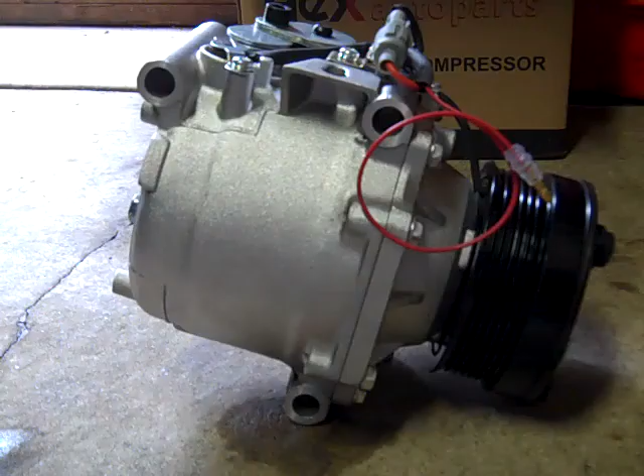Okay, in today's project I'm replacing the AC compressor on my 99 Saab 9-3. So to begin, I'd just like to give a little background information on what models this would apply to, why these AC compressors fail, what's the most common reason for having to replace the compressor, and then a quick overview of how the replacement is done on these.

So first of all, the 99 9-3 that I have - this process would also apply for all the old generation 9-3s from 99 through 02 and the 03 convertible. Also very similar would be the new generation 900s that were made from 94 through 98. And there's a lot of similarity to what I'm going to say that applies to the old generation 9-5s as well, that started production in late 98, the 99 production year, up until near the end when they began to produce a new generation 9-5 right at the end.

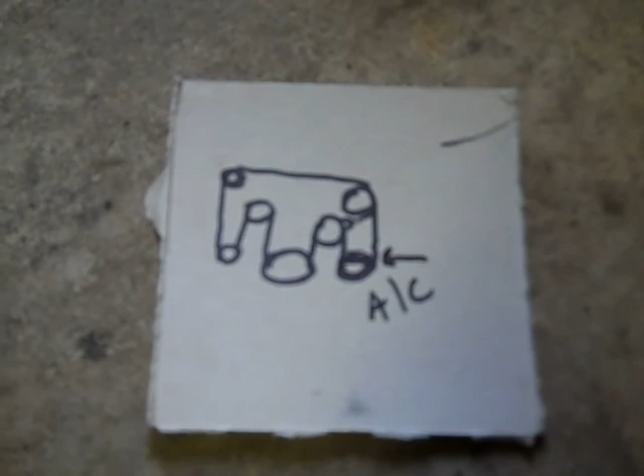So let's go start on our project for today. Now, anytime you take a belt off a car where you're not familiar with it, it's a nice idea to just make up a little diagram, because you may think you'll remember how it goes on, but you can be surprised - you just might not when the time comes to put it back together again.

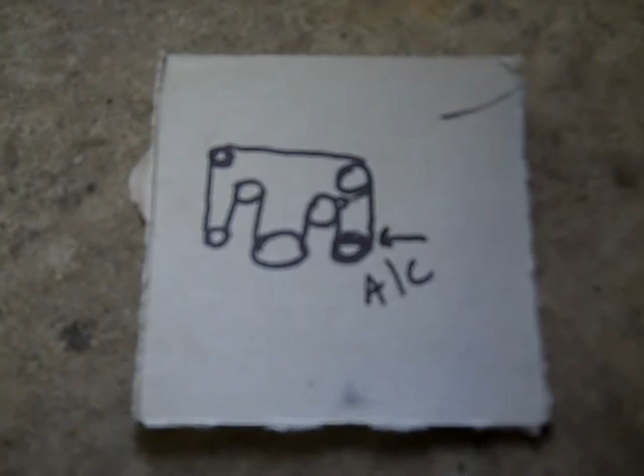But what I found, I really didn't like that, because when you would have it in drive, the belt tended to set up a bit of a vibration, and I think it put extra stress on the water pump, the way this was routed. It's just kind of my feeling on it, I don't know, but I think when you eliminate the AC compressor, it puts a little more stress on this water pump bearing. It's not as evenly distributed on there, and it may lead to the bearing failing on the water pump.

But that is an option. You can run a shorter belt if you don't care about the AC - if the AC is not working.

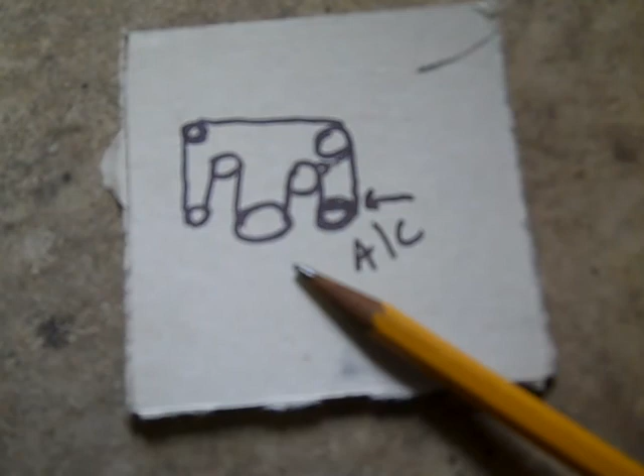So anyways, here's your belt diagram. Just make a little diagram, draw your little pulleys, and draw the belt around the pulleys, and make it much easier when you go to put it back together again.

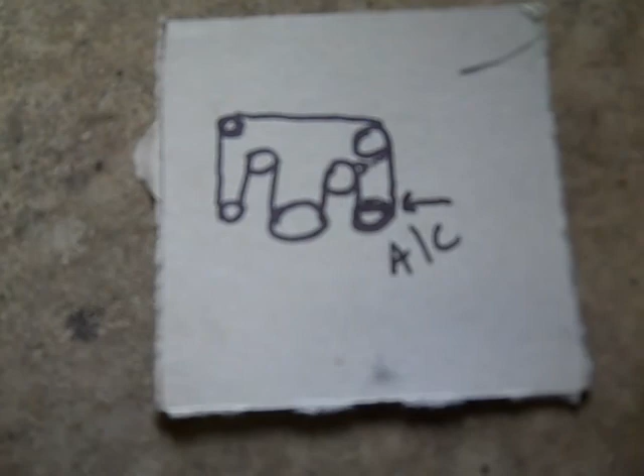Now actually, I'm not going to take even the belt all the way off. I'll just kind of move it out of the way here from the compressor when I do this. So let's go take a look at what's involved with taking the belt loose on the car.

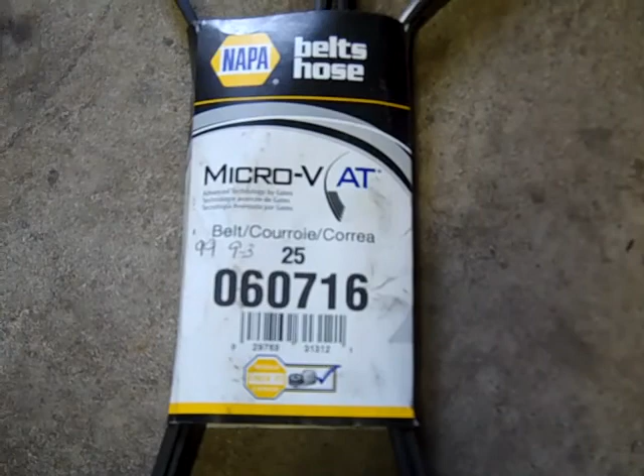Here's the part number for the NAPA belt that I used, which may help you if you decide to, or even as a temporary fix, if you want to just put a shorter belt on there until you figure out what you're going to do with your compressor. Here's the part number for a NAPA belt that will fit.

Okay, to release the tension on the belt, you'll look down at the tensioner, and you can take a 1/2 inch extension. Make sure it's seated - I've seen people crack these. You see the receptacle there? Saab has a special tool that fits that perfectly, and it's angled, you can put it in there. But a half inch bar is what most people have, and that'll work.

But make sure it's fully seated. Sometimes you'll get crud and stuff in that hole, and you may not really have it fully seated. Then when you go to put leverage on it, I've seen it happen many times - people crack these, break the ear off, and then you've got no way to grab it. There's quite a bit of tension on a tensioner, so there's no way to really move that easily once that's broken, and they're fairly expensive.

So get that seated down there, and then you want to use an Allen wrench - this is actually a little tool that comes on a new tensioner, because when it comes, it's in the tensioner. So you take the tension off. There's a little hole you can slide this into - it's pretty self-explanatory. You'll move your bar back and take your tension off the belt. There's your tensioner down there.

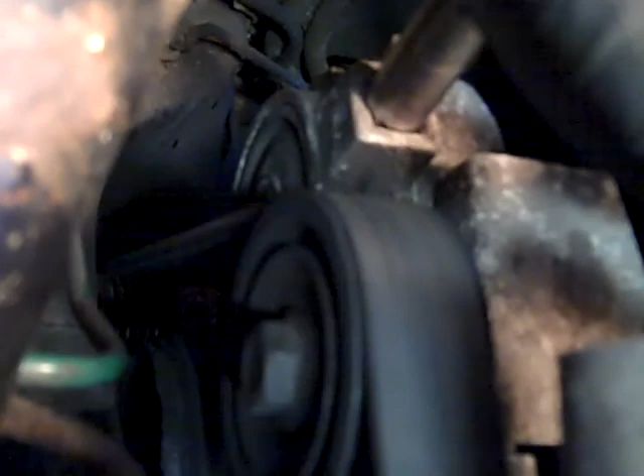Now, just to mention briefly, this top idler pulley right above the tensioner is an extremely common failure item on these Saabs. I'd say they go about every 60,000 miles because they're just a sealed bearing. I've seen them go many times without any warning - they won't even start making noise first, and they'll fail and can leave you stranded. They're not very expensive, and they're very easy to change.

So what I do with any Saab I get - if I don't have a service record of when this was changed, I'll just go ahead and change it immediately when I get the car, rather than have a failure and get stranded. Just a recommendation: if you don't know when that was changed, go ahead and put a new one on.

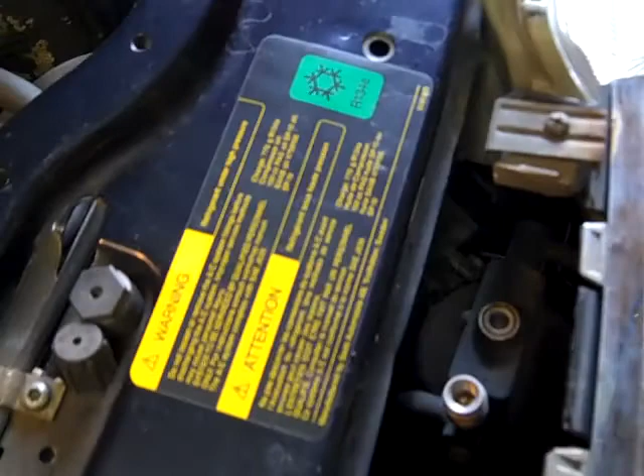Now you're going to want to discharge your AC system, and the proper way to do it is to use a vacuum pump and have it evacuated. If you don't have the equipment for that, you can take it somewhere and have them do it. If your system is old and there's no longer any refrigerant in it, and you're just changing the AC compressor, then you don't have to worry about it.

You can very carefully check it by taking off your cap and giving a little press on the valve - of course, using all safety precautions and goggles, because there'll be quite a bit of pressure in there if it's full, so you don't hurt yourself.

Now mine, originally my AC was working a few years ago when the compressor first started making noise, but it's discharged over time, because just now I took a screwdriver and there was only a tiny little bit of pressure in there in the system.

So what I'll do when I go to recharge it is put some dye in there. It's fairly inexpensive - you can get a dye kit. It comes with special goggles and a light, and it'll show up.

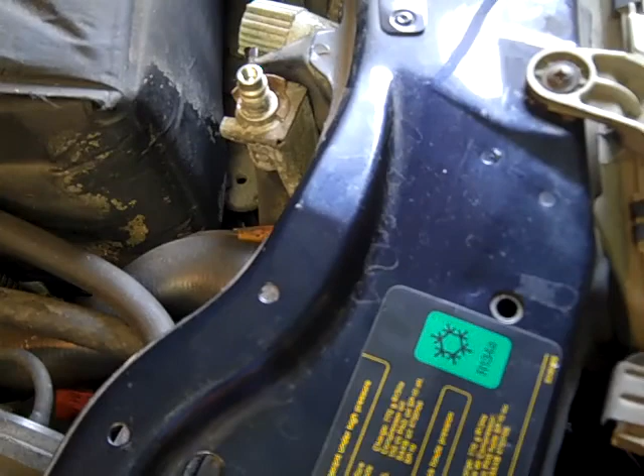So I always advise, when you recharge these, put some of that dye in there. The common failure on these systems as far as leaks go, there's a couple hoses down here under the radiator, and those are a common failure item. Anything else could leak too, but your condensers usually don't go, and your evaporators hold up pretty good, but here and there they'll go. Most of the time it's a couple hoses that'll fail on these and leak.

So anyways, the other thing as far as discharging it - before you take your line off, it's kind of hard to see down here, so get a light. Down there, you see the radiator hose, the lower radiator hose attaching to the water pump on your left, and on the right you'll see an AC hose. Right down there next to it is that 13mm bolt.

You just take an extension, take that bolt out, and then you can pull up on it. But I recommend leaving it sealed up until right at the end - it's never a good idea to leave these open to the air for an extended period of time. So I like to open it up at the last minute before changing the compressor, I'll save that for last. Now I'm going to go under the car and get everything loose and ready to take the compressor out.

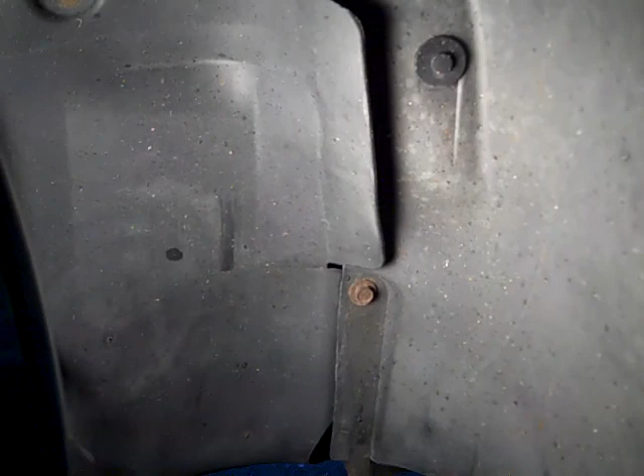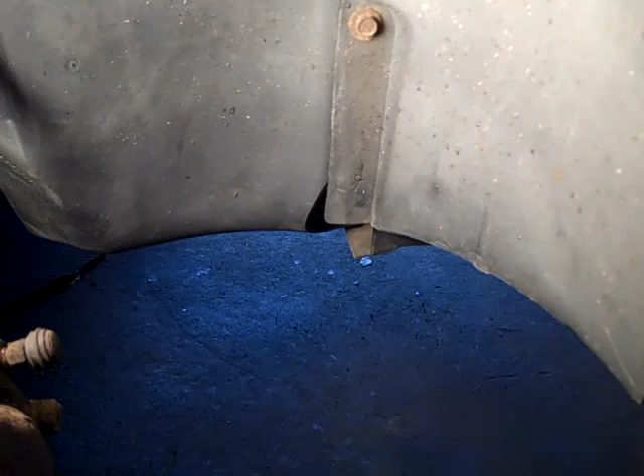Now I went ahead and took the wheel off. You're going to want to do that, just for ease of working on it. You could try to work your way around it, but take the wheel off, jack it up. Now I put 2 jack stands under it. You want to be safe. Don't ever take a chance with your life, because you're going to be laying on your back working under this right front corner of the car. So I went ahead and put 2 jack stands under the subframe on the front here. Now the first thing you're going to do, there's this shield here, a belt protector.

Pretty self-explanatory, that comes off. Most of them are 8mm. There's a 10mm here that goes through a little clip to your inner fender well here.

It's up to you, you could take the whole thing off, or what I'm going to do is just take the lower front part of it loose and peel it back out of the way. If it starts to aggravate me or be in my way, then I might go ahead and take the whole thing off. The only thing is, you see this plastic 10mm nut, it goes on a little stud that's welded to the body there. And I've found over the years, any car from up north where you get some salt or anything, 9 times out of 10, even though it's plastic, you go to take that off, it'll snap the stud off. You may be able to spray it up, get a little something on it, but it's very likely that could break off. You can always drill a hole and just reattach it there with a screw, so it's no real big deal.

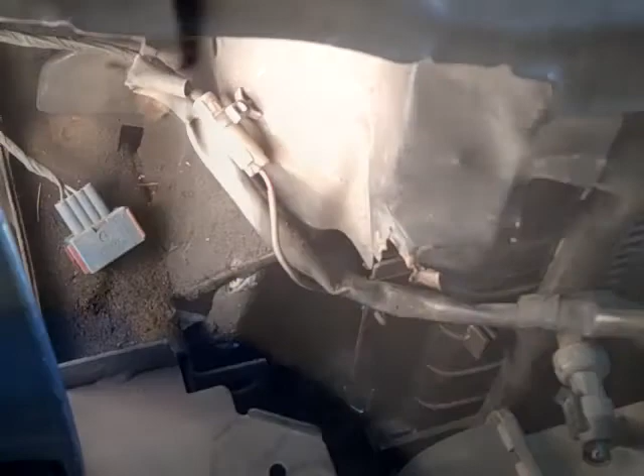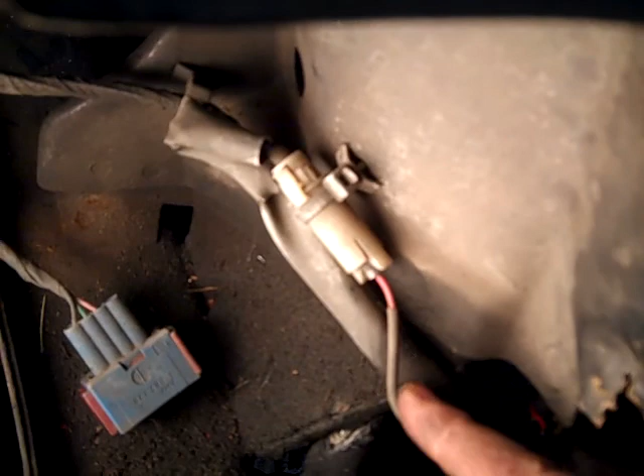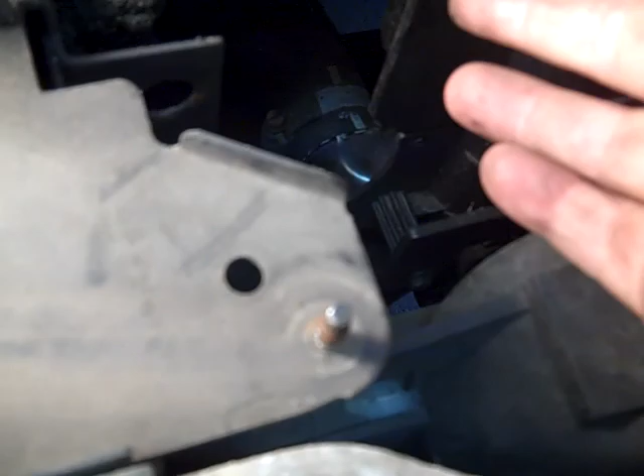Now I just wanted to show you something. The power feed for the compressor is behind the headlight. You can actually get at it without taking the headlight out, but it only takes 2 minutes to take the headlight out. And if everything's secured as it originally was from the factory, you might want to do that, because the wire also has a little push pin here that secures it to your radiator, which is hard to get at. So just pop the headlight out, and then you can get at your power feed wire here. And when you put your new one in, it'll be easy to route the wire up here the way it's supposed to, out of the way, so it doesn't interfere with the belt or anything. So just a little tip there, don't mess around with it. Just take the headlight out, it's a lot easier to access it.

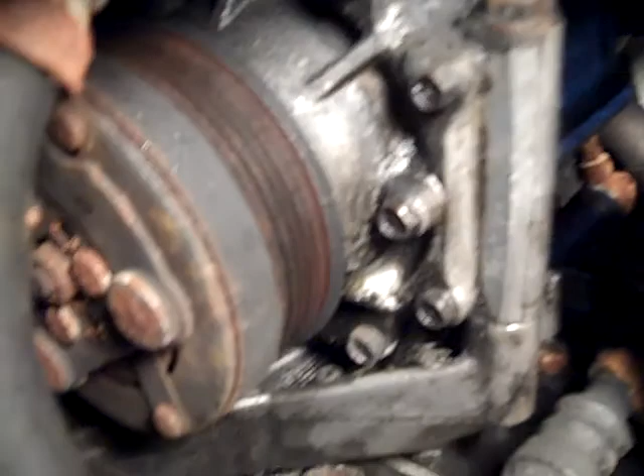Now with the shields out of the way, you can see the compressor. You've got these oil cooler lines that'll be kind of in the way, but you'll find once you get the compressor out, you can just gently bend these down. You'll be able to pull the compressor out.

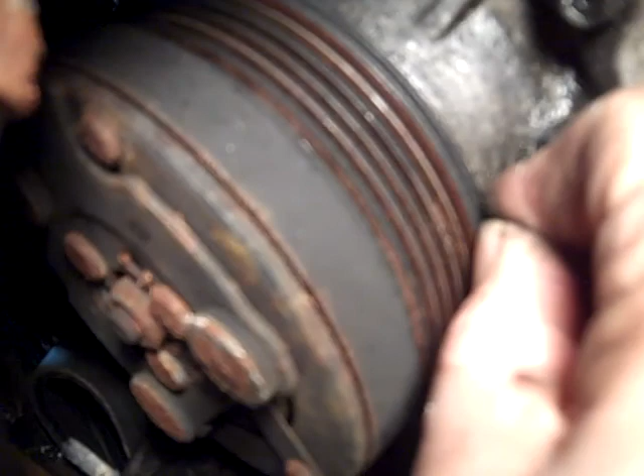Just wanted to show you the pulley here. I can actually, you can hear it there, the rumble. And then if you can hear the little waka waka waka, you don't see a whole lot of visible movement there unless you look closely, but that's what it is. It's rocking back and forth here, setting up that noise. So that's the problem.

So here you can see one of your, I believe these are 17mm, if my memory serves me right. There's 3 of these you've got to get out, and I don't remember which ones, but perhaps this is one of the ones where you actually don't have clearance to take it all the way out because they're long. So what you have to do is take them loose and then leave them in the compressor itself.

But as you go to take the three bolts out, I'm going to access the other two. I believe the top one toward the left side of the car I can get from the top - I'll reach down by the radiator and get it. The upper one on this side I can probably get right through the opening here, and this one is easy from the bottom. I'll get those loose, but before I go too far, I'll have to disconnect my AC line from the top.

Once we've got everything loose, the long bolts that I can slide all the way out while it's in here, I'll go ahead and slide them out so I'm not having to mess with them. But you'll have to remember which ones you had to leave in here and pop them into the new compressor. The most awkward thing will be hanging the compressor on the hook - sometimes that can be awkward, but once it's hung up there, it's easy enough to get the bolts started.

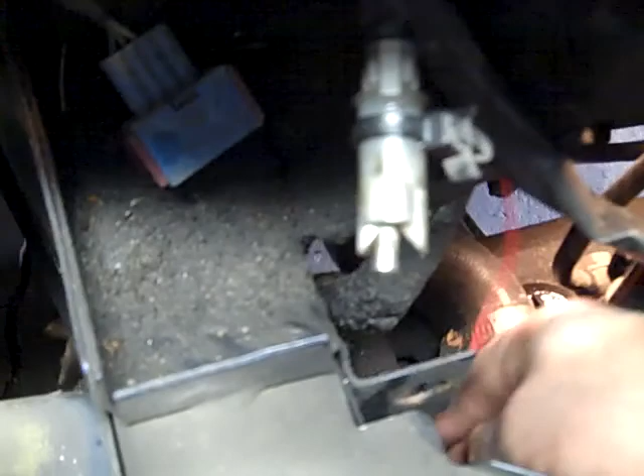Here's the wire connector that I was just showing you. I sprayed a little WD-40 on it because it's a little tight to get out. I pulled the wire through here, and for your new one, make sure this has got tension - snug that up and click it on there, then push it back in and it'll lock in here.

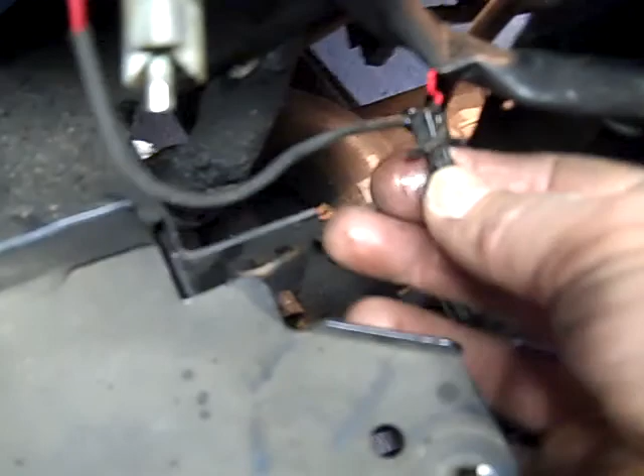And then if you want, you can transfer this little wire tie and clip - it pops into a hole in the radiator there.

Okay, another tip - I end up taking this air intake hose out of here to get a little more access from the top for the one bolt here. And there's another reason for taking out the headlight, because I found that you can actually stick your arm through the headlight opening and it helps you get access to removing the bolts on the compressor here. So just another tip there - I always find that anything that's not hard to remove and gives you a little more room or visibility, go ahead and take it out of the way.

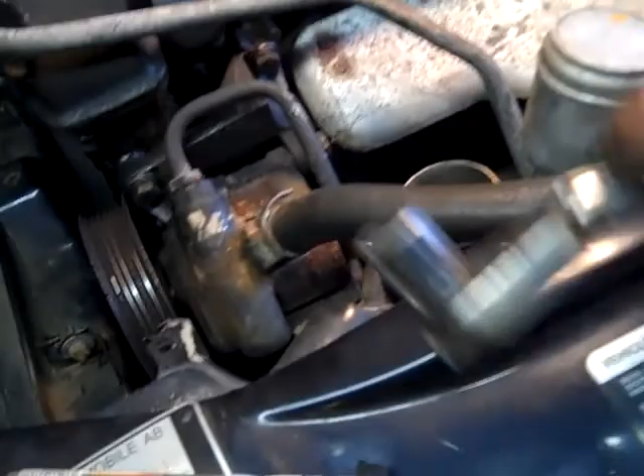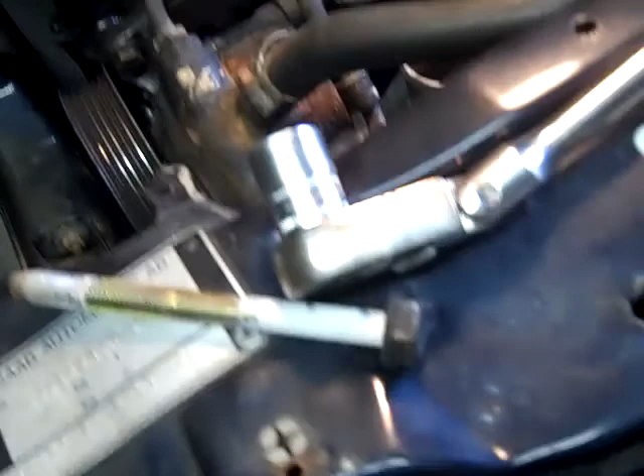Okay, there's your first bolt. Boy, I guess maybe because it dried out, but it was extremely tight. What I had to do is, first of all, I like to use a spark plug style ratchet, because these bolts have a little angle to them, and a straight ratchet may not do it. But you've got to make sure you've got it perfectly seated on there. Then for leverage to actually break it free, I had to take my long wrench and stick it on my ratchet. Just a correction - earlier I mentioned I thought I remembered these being 17, but they're 16mm heads on here.

So this one actually came all the way out. There's enough room between the compressor and the radiator that you can take it all the way out.

Okay, a combination - for the other top bolt, I went ahead and got it from the top. There really wasn't room to reach up from the bottom to get at it, so I got it from the top. Again, another reason to remove the headlight, because I found myself with one arm going through the headlight opening - you'll find a little opening where you can get your hand in there. Then I had to put my spark plug ratchet on it from the top, and it was extremely tight. Again, I think it dried out - I'll put a little lube on these when I go to reinstall them.

But for leverage, I really needed that extra 1.5 feet of leverage on my ratchet to get that loose - very tight. So I've got the two top bolts out, and the bottom one I started to loosen, and that's the one I was trying to remember earlier. That's the one that on this particular model has to stay in the compressor. So when you go to put the new compressor in, you'll have to put that long bolt in the bottom first. There's just three - two on top, one on the bottom. The bottom one is the one you're going to have to put into the new compressor before you slide it back up in there, because there'll be no room to put the bolt in afterward. But these other top two, it's no problem - you can finagle it, reach down there and get them in.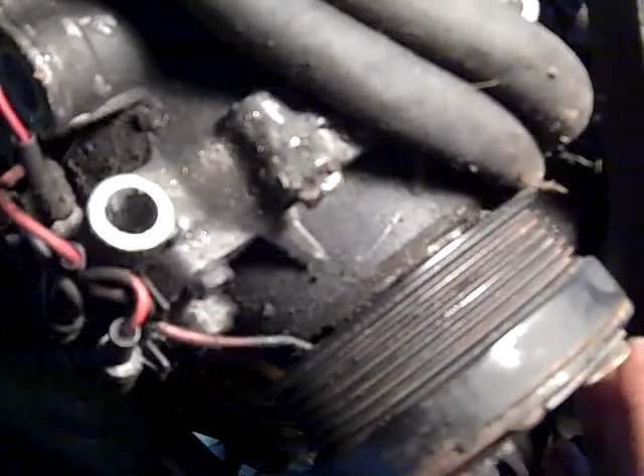Okay, I've got it out, and basically what I'm showing you here is I'm taking it over the top of the cooler lines for the oil. You gotta kind of twist it and finagle and get out of there.

That's not really a big deal. What the big deal is, I remember on these now, there's a clearance problem with this hook. What I ran into, let me show you. It's really what makes this job a pain.

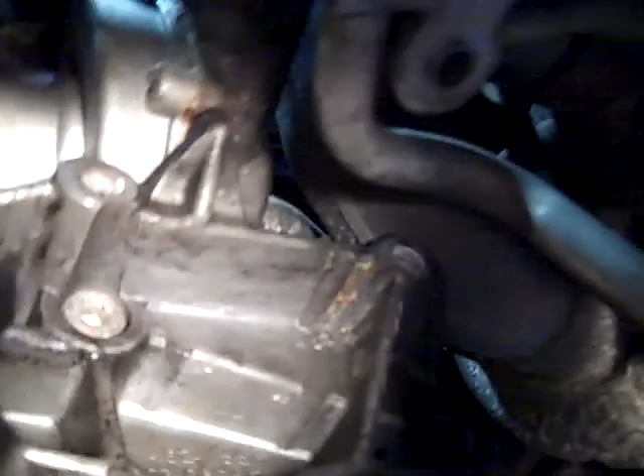You can see up there, see if I can point. This hook here, well, when you're hanging the compressor on there, you see how little clearance there is with the water pump. And the problem you have, see your AC line here, see when I press up it hits the bottom of the hose there on the pump.

So you're running into a clearance problem. To actually get it off the hook, first of all, it's got to be an absolute straight shot. And actually with this one, because of the clearance problem, I had to take my pry bar and give it a little pry under here, which I knew would happen, but it's no big deal.

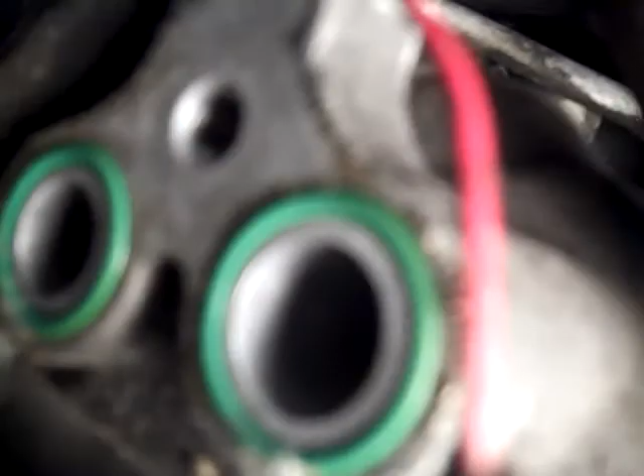Let's see. If you look up here, see the hanger, I just broke it to get it off. But you see how on the top you've got your O-rings, and there's just no clearance.

So I'm thinking, because what I've done before, I only remember doing it one other time, which, you know, my car is going to be the same way. On one car, to get it back in, I just ground an opening on the hanger, on the new compressor, so that I could get it in there.

Because really the hanger is just, theoretically, for your convenience, just to hang it on there because it's heavy, and then you can thread your bolts in. But that hanger, in this case, ends up - it may even be like assembly on the assembly line, you know, they hang it on there. But in any case, it's a problem for me now because the clearance is really just not there.

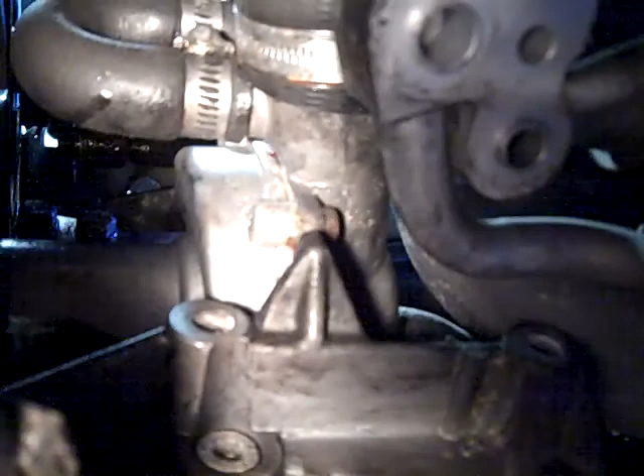You know, when I push up on the hose snorkel there, there's not enough clearance. So the problem I'm going to run into is the reverse of when I went to take it out. I'll go to try to hang it on there, and I won't be able to get it on the hanger because I'll be pressing up against the hoses there, and then you risk messing up your new O-rings - they're in there pretty snug, but popping them out.

And I really hate to do it because it gets messy, and then you're under here. But I'll gain some clearance on the bottom of that water pump. This would be a whole lot easier - I changed this water pump, you know, like a year ago or something. This would have been a lot easier to do when the water pump was out. But anyways...

I'll gain probably enough clearance by taking off that lower radiator hose off of the coolant pump. But what a mess - it'll just keep dripping, the antifreeze will be dripping down here while you're working. I hate to do that.

So I'm kind of wrestling with the thought of grinding the hanger on the new compressor and seeing if I can slip it in there. But just from experience, I know even then it's going to be tight, and I'll be fighting against that hose up there, the AC hose, at the same time.

So I'm going to give that some thought. I don't even think I'll put the new one up in there without grinding it if I go that route, because I just know there's not enough clearance. I couldn't get the old one off. There's just no room.

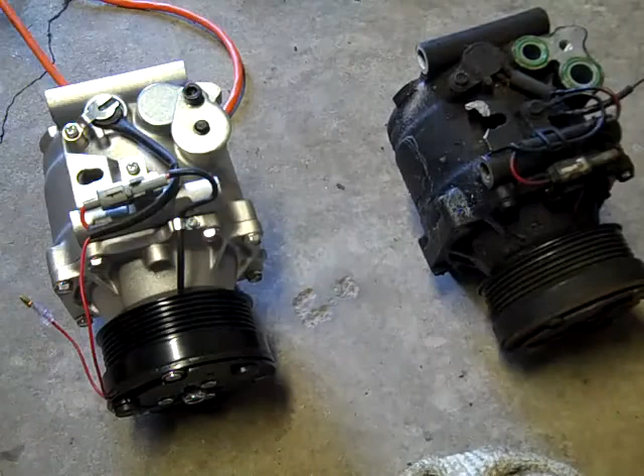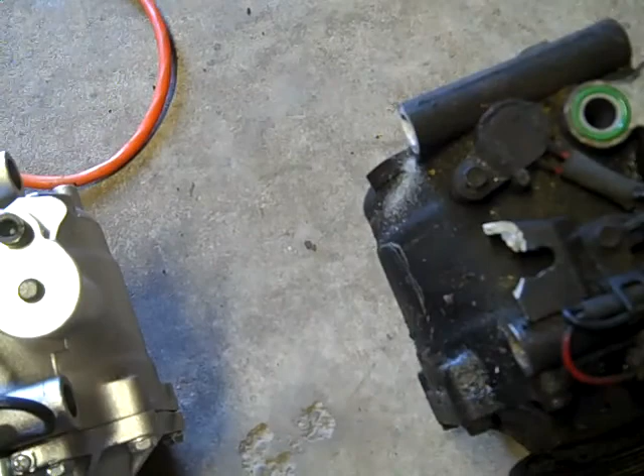Alright, I made up my mind. I'm going to give it a shot with grinding it and see if I can leave the cooling system sealed up. Here you can clearly see how it broke off there. So I know from experience I had it perfectly lined up, because if you tilt this or get it rocked, you're not going to get it off either. It's got to come straight.

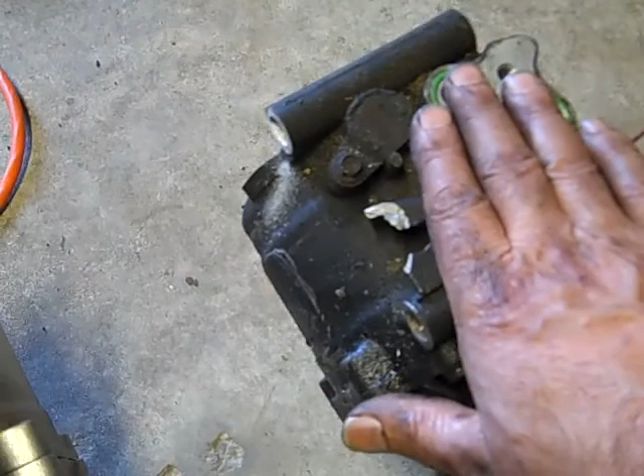You've got to go up off the little ball and then straight out. Because of the clearance problem here, with the snorkel hitting the water pump, I wasn't getting any up, not really anything up. So you've got to go up maybe between 1/8 and 1/4 of an inch, up and over. Then you're dealing too with the recesses on here. The snorkel has about an 1/8 inch part that goes down in these holes, which you don't want to damage either. So going back in, you're still going to be dealing with the O-rings. It's got to go up, and that's got to go in at the same time. That's really the most unpleasant part of the whole job. It's a nuisance.

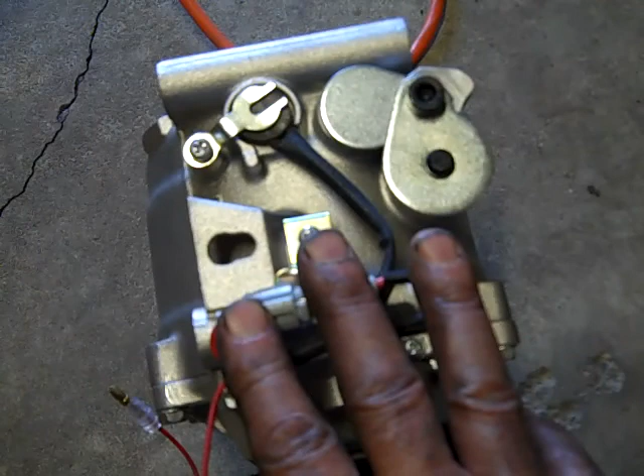I know I'm still going to have to wrestle with it, even doing it this way. But the only thing is, even draining the cooling system, short of taking off the coolant pump by taking the hose off, I'm going to gain maybe 1/8 of an inch where the snorkel can rise up, and I may be able to hang it. Maybe, it's an if. So I'm just gonna take my grinding wheel, and I'm gonna open this up, and give it a shot that way and see if I can put it in there.

Finagle with lining this up with the hose, and then you got to get your 3 bolts started. I'm gonna lube those up, so they can get started in the threads right. So that's my next step. I'm gonna go ahead and grind this and go wrestle with it for a while, and I'll get back, let you know how it goes.

So there it is. Just opened it up nicely. I'm gonna give it a shot.

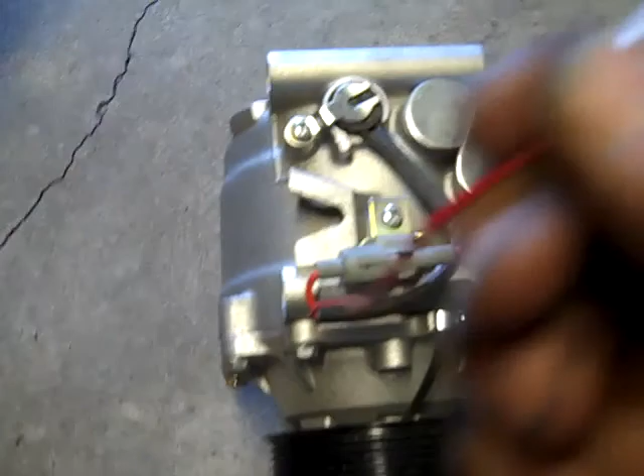Just one other thing I wanted to show you before I went to put this in: the power wire isn't nearly as long as the factory one. So while it's going to reach, I'm not going to be able to put it in the original location. I know this, I can get this to reach because I can move this end here. Just have to make sure it's out of the way. It's one of those things you're dealing with, aftermarket - a little shorter wire.

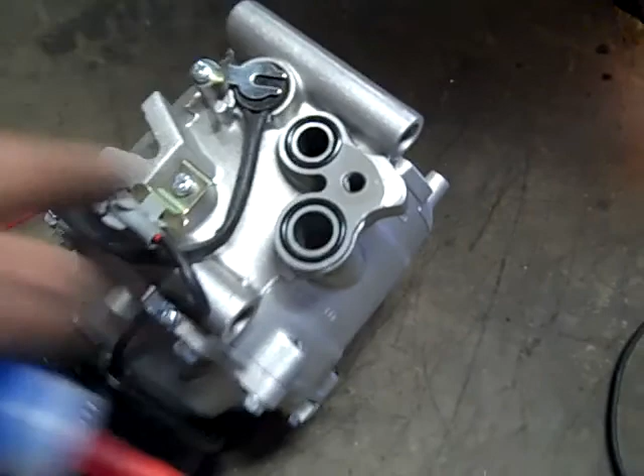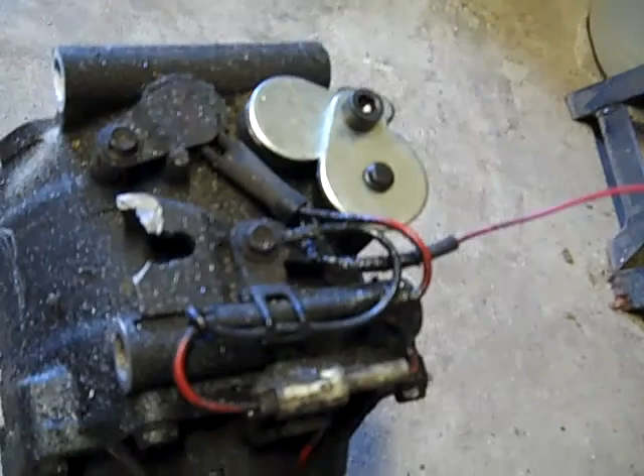Anyways, here it goes. Just a couple other things before I go for it here. I went ahead and put the cover for here on my old one because this compressor was still working, and if I decide at some point to replace the clutch on here, I've still got a compressor that'll work. So anyway, sealed that up.

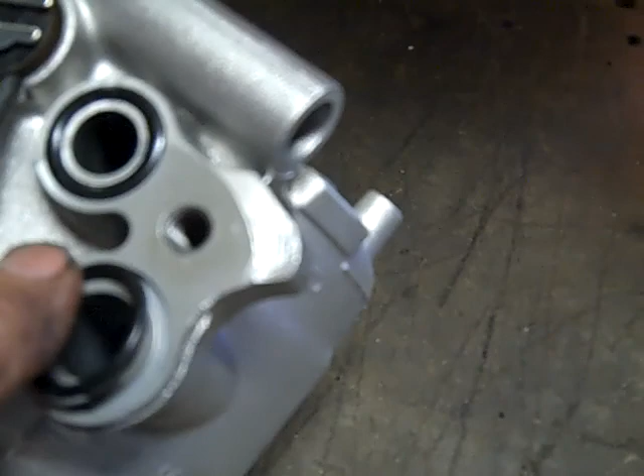But now these O-rings here, they're just sitting in here very loose. I mean, they're just going to fall right out when I go try to put it in there. They're not anywhere near as snug as the other ones. So I'm going to take a little Permatex gasket stuff here that stays tacky, and it's going to maybe help these stay in here, because I know that's just going to fall out as soon as I start wrestling with this, and there's no room to put them back in. So I'm going to have to glue that in there some way.

What I have done in the past with things like this, if I had enough time, but I don't want to, is I could actually take some RTV and let it dry some, smooth it off so you still have your O-ring contact. That'll keep them in there. I'm going to try this, see if I can get this up in there. Like I said earlier, I'll double check - I'll put a mirror up in there, make absolutely sure that I've got my O-rings, that they haven't become dislodged in the process of wrestling with this thing.

Yeah, I keep thinking of things. Need to mention this now.

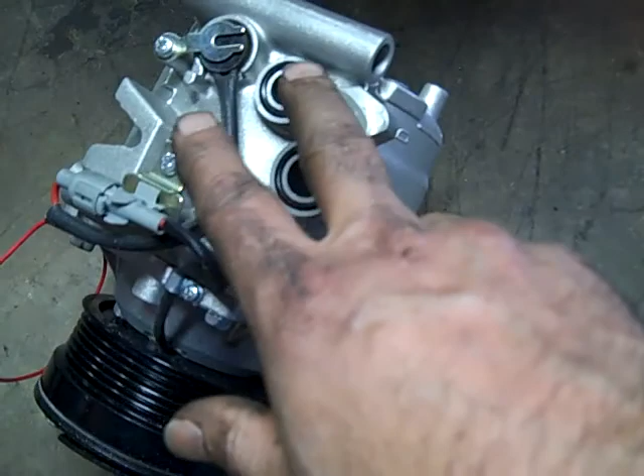You tilt this a fair amount to get it up over the hose. You just got to be careful not to tilt it too much, because there's oil in this compressor, a fair amount, and you're going to spill it out the holes. Any little tip like that can save you some frustration. Same thing in reverse when you're taking the old one out. If you tilt it too far, you could get oil on yourself, it'll pour out of here. So as I go to put this up in there, I'm conscious of that. I can tilt it, but I can't get crazy and tilt it too far, or the oil will come out.

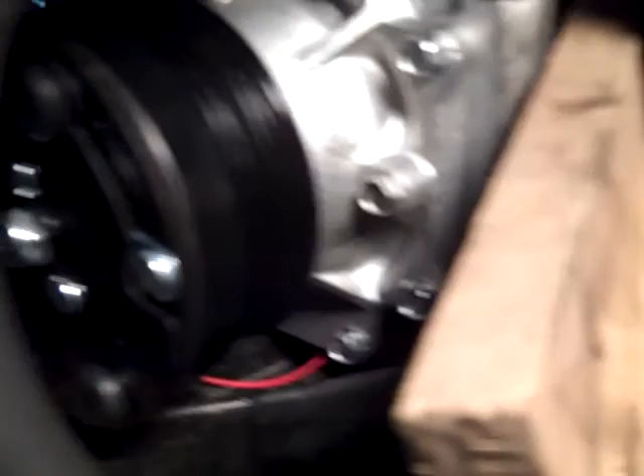Well, good news everybody, I'm quite relieved it worked, and it really wasn't that bad. Little piece of wood, kind of like my substitute hanger here, because it's very awkward to work with. It's heavy, and you're trying to line up and get these bolts started at the same time, so you don't knock your O-rings off on top, and you line up your snorkel on top. So what I did is I braced it with the piece of wood here, and then I started this bottom one, lined it up and started it, just a few threads.

Now let me go up top and show you.

A big thing, before I got too carried away, I started my two long bolts on the top, but at the same time I had to be very careful that I could get the top AC lines, where they attach, started. Because it's just the one bolt, the 13mm head bolt, you don't want to cross thread it. You've got to get it in there. And again, you have to make sure that the O-rings don't come loose.

So I use my mechanics mirror, you just got to be patient, take your time. I made sure that my O-rings were seated still. And then, the procedure I've always liked to do with cars is keep everything loose, don't tighten anything up first. Get everything started, so I got my bolt here started.

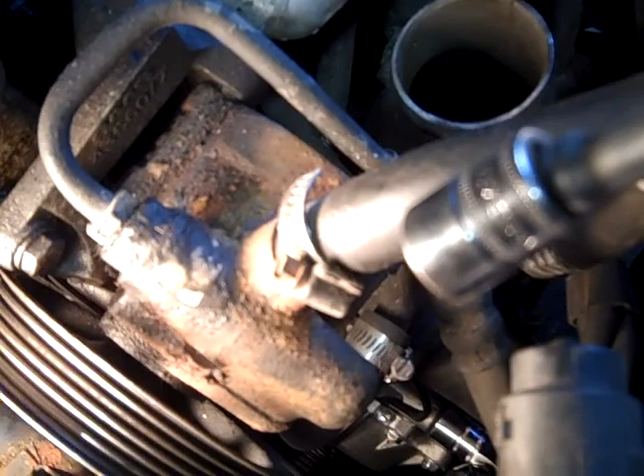And there's a tip with this. The end of this is a wobbly - old Snap-on extensions I have, a set with the wobble on the end, and it gives you just the perfect angle, because you're going to find that a straight shot down through here isn't going to work. So I love using those.

So that works great, got that started, and I just left this wrench in here to show you. I've actually snugged everything up, but again, the spark plug style wrench, I love this Snap-on, because you've got these angles to deal with. This way you can get the socket on there square and get good leverage. So I snugged everything up, I've got the 3 mounting bolts in.

I've got my AC line connected, and now it's just basically a matter of the stuff I explained and showed you in the beginning - putting everything back together, connecting up my power feed wire, putting the belt back on, all my shields back on. But all that's pretty straightforward once you've taken it apart. The hard part's done - the one thing that really hangs you up, and it's a struggle.

And so again, this is a lesson learned. I've only had to do this one other time over the years putting compressors in these cars, and I've known them to be tight. This was a case where my preemptively just going ahead and grinding off the hanger really gave me enough room. You're dealing with maybe 1/8 of an inch to deal with there, but it gave me just enough, by not having to get over the hump on that hanger.

So I mentioned how the power feed line on the replacement aftermarket compressor was shorter, so I've got it plugged in, and what I've had to do to get a little more - so just so there's not tension on that, you know, when the engine's running and the engine rocks, I pulled these out of their normal receptacles. This was up here, this was over here, and it's just too tight.

You know, I could splice a wire or something, but I've just pulled these out and laid them down here to get a little more.

You know, these are going to be alright. They're not going to chafe or anything. I'm just going to lay it here. It'll give it a little more slack.

But while I was doing that, I noticed that this power steering line here, the way it's designed, naturally tends to rub here. They've even, from the factory, put this rubber piece on the steel here just to give it a little extra protection on the line. But I noticed the hose here, this power steering hose, was starting to chafe right through this and through the lining on the hose.

So what I did here, this is a piece of heater hose that I just split and put on there, and I've got a wire tie, and I'm just going to wire tie that on there to protect that hose. Eventually it would chafe through and you'd get a big power steering leak. So it's just one more thing I noticed while I was fooling with this power feed wire. I just thought I'd bring that to your attention. These little tips can save you a lot of trouble.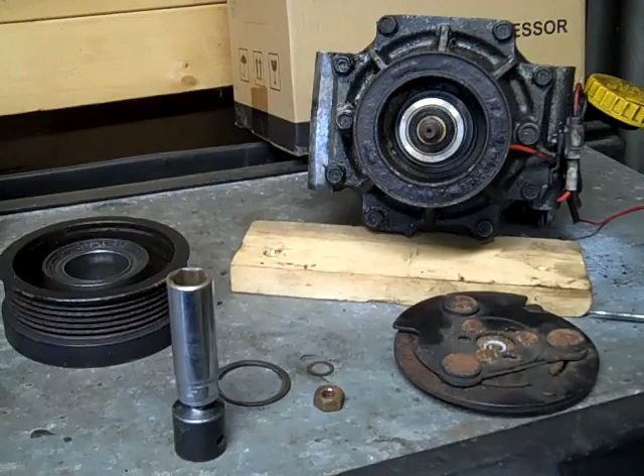Okay, I told you I'd look into the compressor clutch, and it turns out this isn't that hard, and if you have the right tools you could do it right on the car. In that case, you could save having to change the compressor, evacuate the system and change the whole thing. You could just change the clutch. I'll just show you a few things.

The clutch plate is held on by a 14mm nut. There's a little washer behind it. You'll find that it's good. You can just take an impact and bump it off, and because it's recessed a little bit in here, you're going to need a thinner wall socket so that you get all the way on the nut. So I just gave it a little bump.

That came right off. Then the part that's the problem - it's not this bearing here on the compressor itself, that's fine - but where the play was and the noise, the bearing that's right here in the pulley is bad, and that's where the noise and the play is coming from.

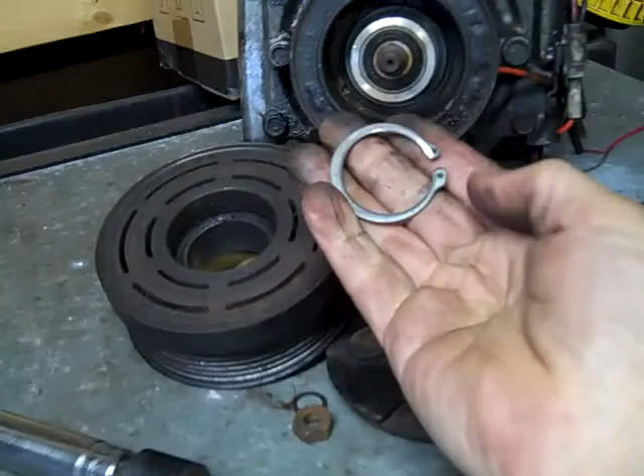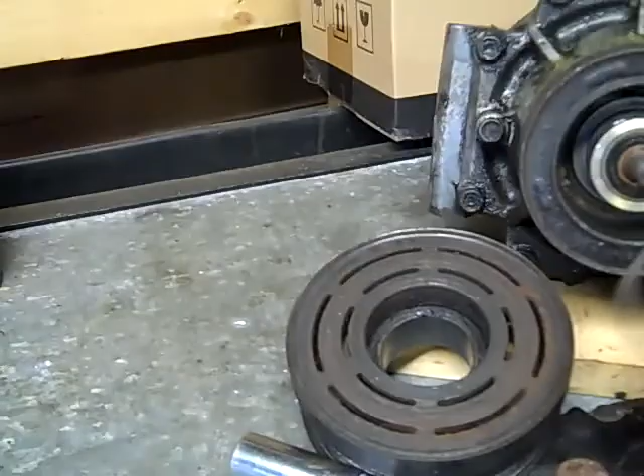And this is just held on by a C-clip, so you take that off. There's a little ridge here. You take that C-clip off, and then you can pull this off. Now I found that I needed to tap it some to get it off. It was stuck on a little bit, but not bad.

So it's probably something, if you can get something behind it when it's on the car, tap it - probably just have to be patient, tap with it, and then you can maybe pry a little bit and get it off. But it's not pressed or anything, so that will come off.

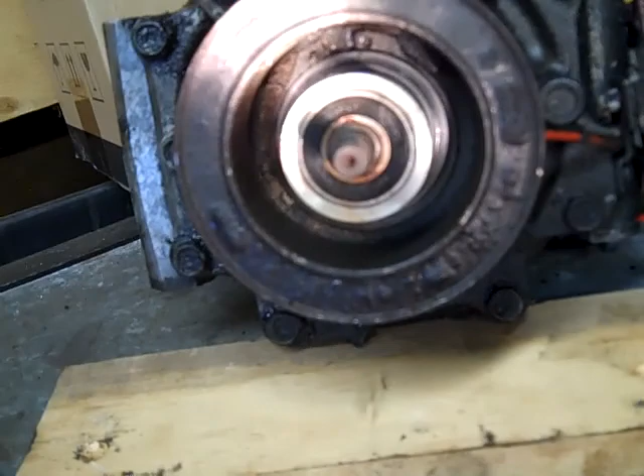Now, if you're going to go ahead and change this part of the clutch assembly too - I don't know if you can see in there, there's a light, you can see down in there - see, there's another C-clip. So to do it, you're going to need a good set of proper pliers to get these off. And this one's pretty deep, so you'll need a longer one.

And I found with this one too, you'll just need a good set, especially to be able to do it on the car. You know, you've got a little bit of room there. But I'd say my conclusion on that is it's quite doable.

And like I said, one of the issues was that the price on these is fairly steep, and you get up close to the price of what the compressors cost now. But the other side of it is, if you've got a good original equipment compressor - like I mentioned earlier, these don't fail really very often. They're good quality compressors that Saab put on there originally.

So I'm thinking, in most cases, the way to go would be to leave the compressor on the car and go ahead and change this clutch, because this is by far and away the major failure item on these compressors. This bearing just goes, and that was the problem with mine here.